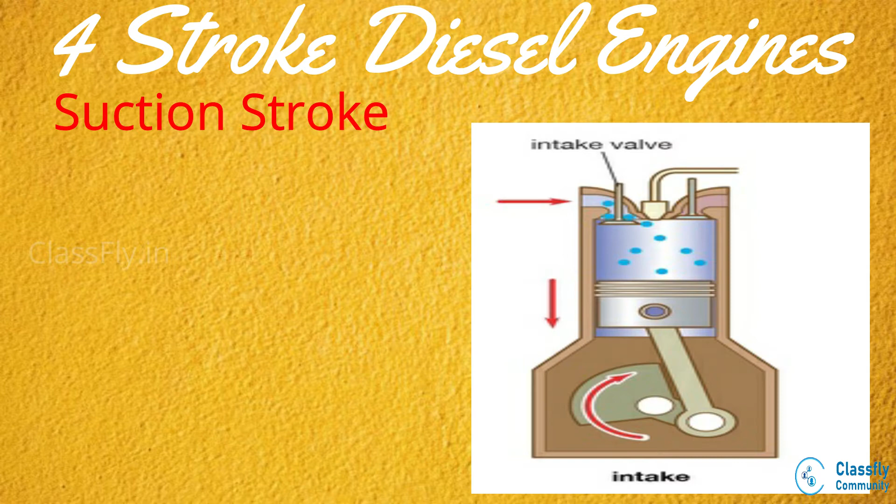Now let us see the working of this engine. At the beginning of the suction stroke, the piston is at its top dead center and is about to move towards the bottom dead center. At this instant, the inlet valve will open and the exhaust valve will remain closed.

The downward movement of the piston produces a space in the cylinder head, creating a partial vacuum. Air from the atmosphere is drawn inside the cylinder through the inlet valve. The suction stroke ends when the piston reaches the bottom dead center and the inlet valve closes. On completion of this stroke, the crankshaft makes half a revolution.

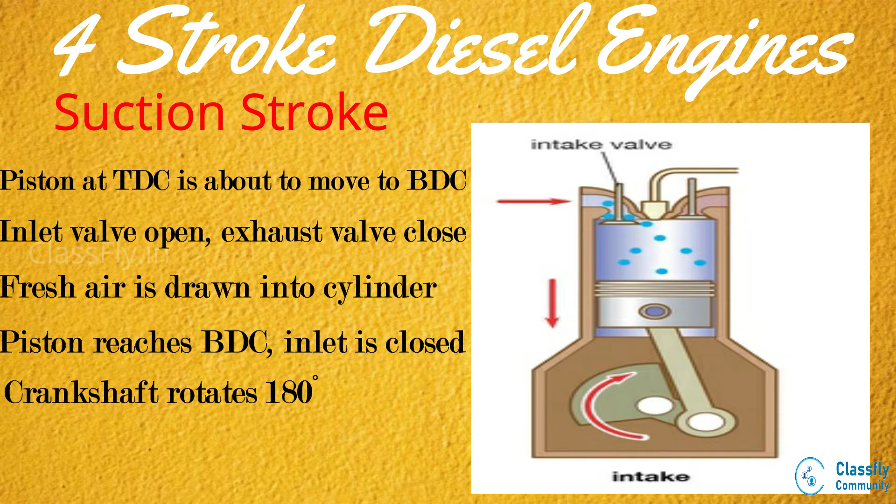During the compression stroke, the piston which is at BDC now moves to TDC. Both the inlet and exhaust valves remain closed. As the piston moves upwards, the air in the cylinder gets compressed, causing its pressure and temperature to increase. The compression takes place adiabatically.

When the piston is about to reach the top dead center, a metered quantity of diesel is injected in the form of fine sprays into the hot compressed air. This is done by a fuel injector. Combustion of fuel takes place as the diesel spray mixes with the compressed air. This combustion occurs at constant pressure, and hence the engine is also called a constant pressure cycle engine.

With completion of this stroke, the crankshaft rotates by another 180 degrees, completing one full revolution. The energy required by the piston for both these strokes is supplied by the flywheel.

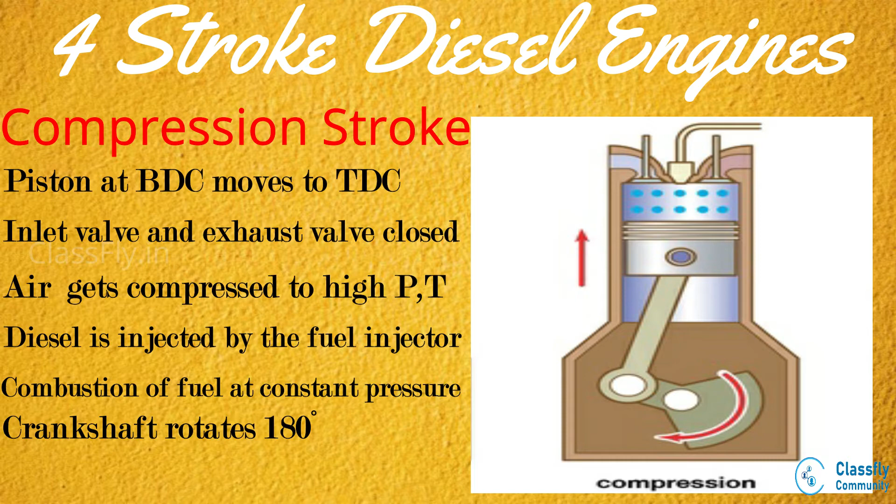Next, when the power stroke begins, both valves remain closed. As combustion of fuel takes place, the burnt gases expand and exert a large force on the piston, causing it to reciprocate rapidly from TDC to BDC.

This force is then transmitted to the crankshaft through the connecting rod. The crankshaft rotates at high speeds as the reciprocating motion is converted into rotational motion. The crankshaft then transmits power through clutches, gears, etc., to turn the wheels of the vehicle.

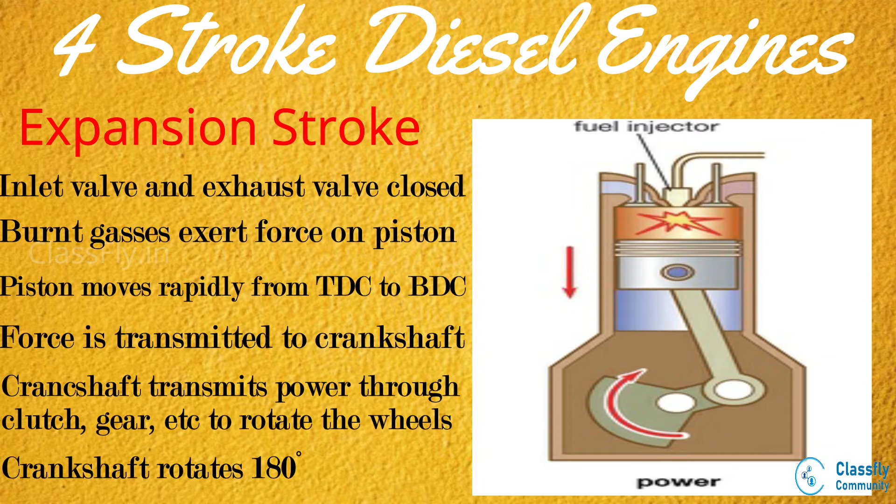The expansion of gases in this stroke also takes place adiabatically. Near the end of the expansion stroke, the exhaust valve opens while the inlet valve remains closed. Some burnt gases, due to their own expansion, escape through the exhaust valve. The exhaust stroke begins when the piston moves from BDC to TDC.

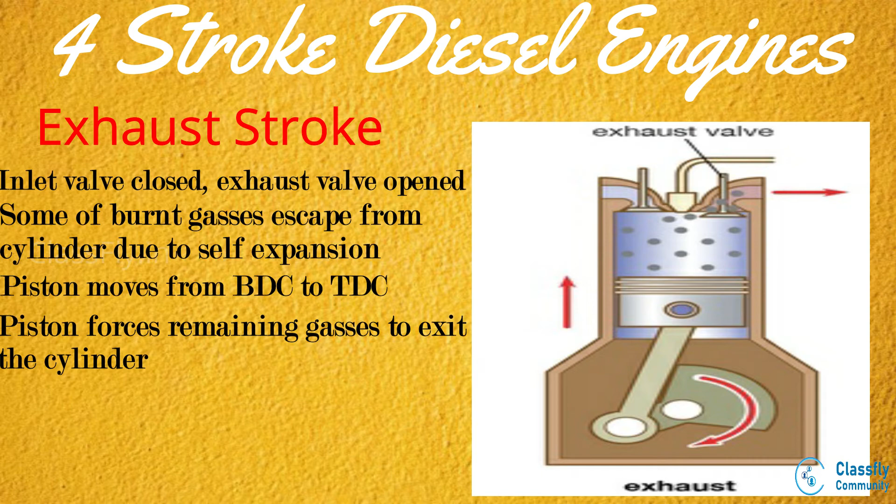The energy for this stroke is supplied by the flywheel, which absorbed energy in the previous stroke. As the piston moves upwards, it forces the remaining burnt gases out through the exhaust valve. When the piston reaches top dead center, all exhaust gases are forced out, the exhaust valve closes, and one working cycle is complete.

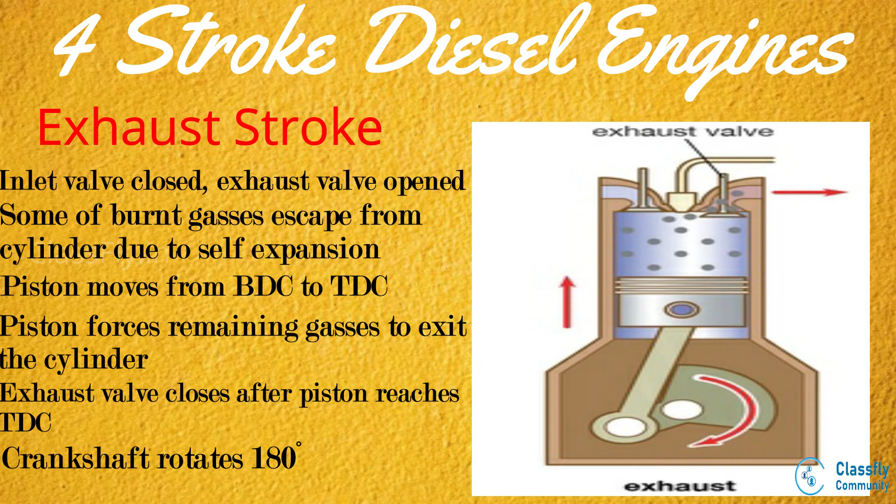Here also we can observe that the crankshaft completes two revolutions in each cycle. The same process repeats again and again to produce continuous power.

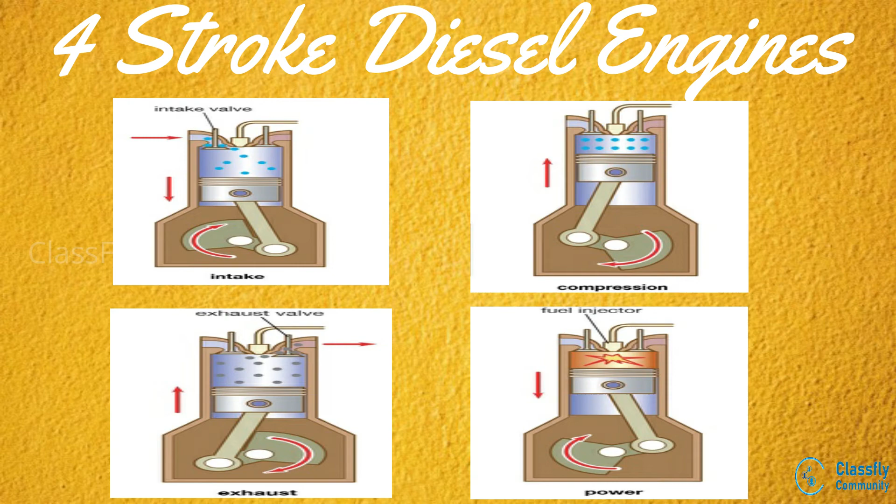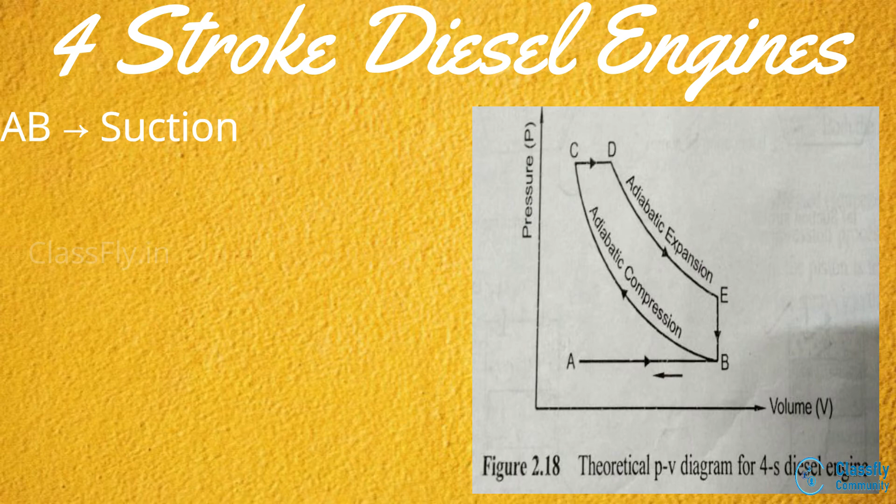The compression of air in the cylinder takes place adiabatically. This process is represented by the curve BC. Also, in the compression stroke, combustion of the diesel fuel takes place at constant pressure, represented by the line CD in the diagram.

In the power stroke, the expansion of the burnt gases takes place adiabatically. The curve DE represents this adiabatic expansion.

The pressure drop which takes place in the exhaust stroke, due to the escaping of burnt gases on their own expansion, occurs at constant volume. This is represented by the line EB.

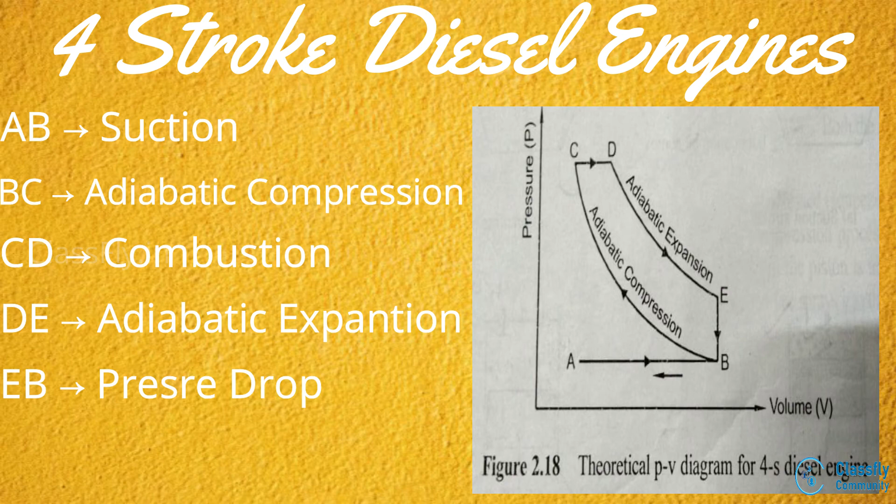Finally, the escaping out of all the exhaust gases takes place at atmospheric pressure. The line BA represents this process in the diagram.

4-stroke diesel engines are mainly preferred for heavy-duty applications. Hence, they are used to power buses, trucks, tractors, and marine applications.